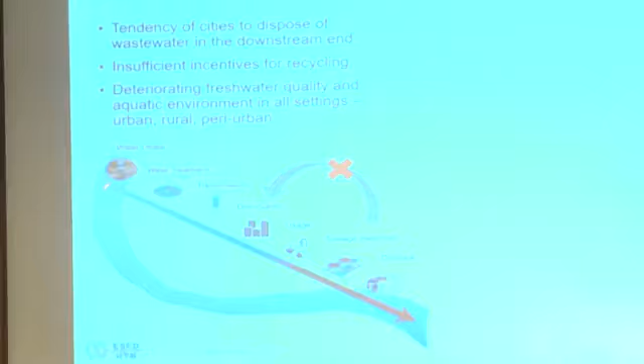So what is the status of sewerage in India? If you see, we are stuck in a linear model of water use, okay? Earlier our primary aim was to supply water for the businesses and cities. So historically we built dams and reservoirs, we lift water from lakes, we transmit it through big lines, we distribute, use, and then the used water, treated, untreated or partially treated, is mixed with our lakes, rivers and water bodies. That is the linear model of development that has been followed.

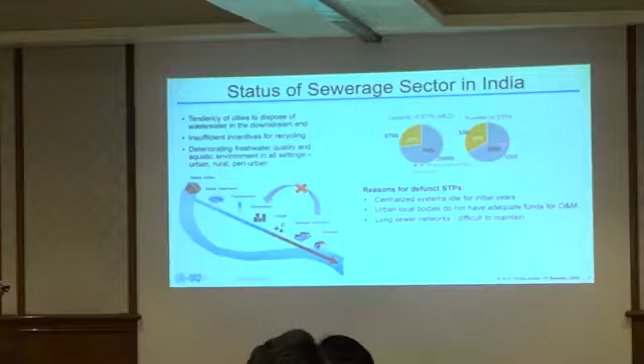Now, STPs are basically proposed to fix this problem, that we'll have an STP here and it will solve it. But an STP will not work on its own unless you put energy, manpower and effort into it. And to put in that effort, you need money. So unless that money is sustained, nothing will be there. So STPs are there, but they may not be operational. Many STPs are defunct wherever you go, because the economics has not been worked out for those STPs. So we have to work out the economics.

There are highly centralized sewage treatment plants which are idle; I will show some photographs where they remain idle. These are just white elephants, sitting there doing nothing. See, the infrastructure is funded by some third party, right? Central government funds and development banks fund the infrastructure, and urban local bodies are meant to maintain them by generating revenue, but there is no strong revenue stream for sewage management, okay? So revenue is not protected, not segregated for sewage management.

So there are issues that I will further explain. The point is that merely creating infrastructure is not sufficient, okay? We may think infrastructure will solve the problem; it may not. The infrastructure is there, but whether it is sustained, whether it is working or not, that is very important.

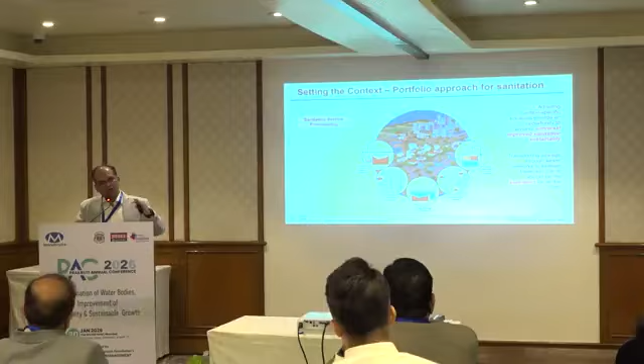So what is happening is we are always jumping on some very high-end solution, that we'll have underground drainage, then the problem will be solved. But if you see, a large part of our cities are unorganized. Informal settlements are there. There are many communities who do not have access to water supply.

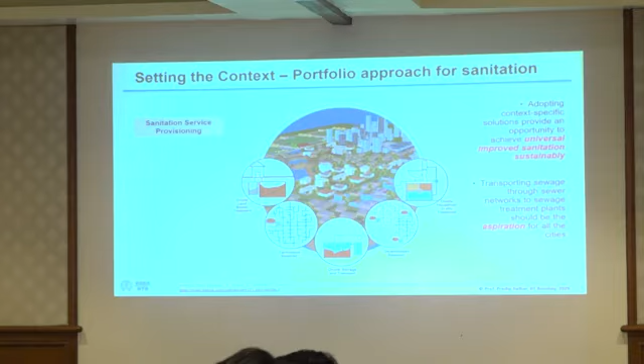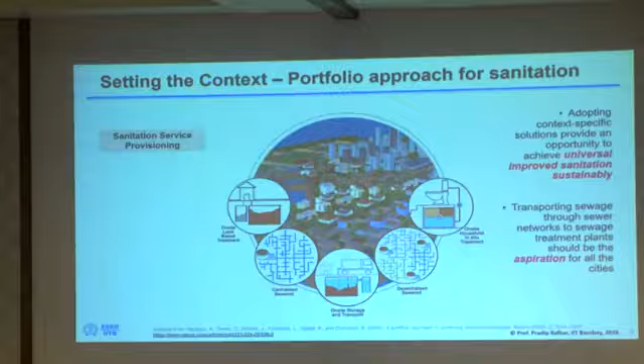So for that, we need to have something called a portfolio approach. Portfolio is that we have to have a bouquet of options given to communities to solve the sanitation problem. If you just focus only on an underground drainage network, only one large-scale STP, that will not work for our future. So we have to move from this centralized sewer; other options are also there, which are not discussed, not prioritized. So like on-site treatment, decentralized sewage treatment, on-site storage and transport. So many other things are coming.

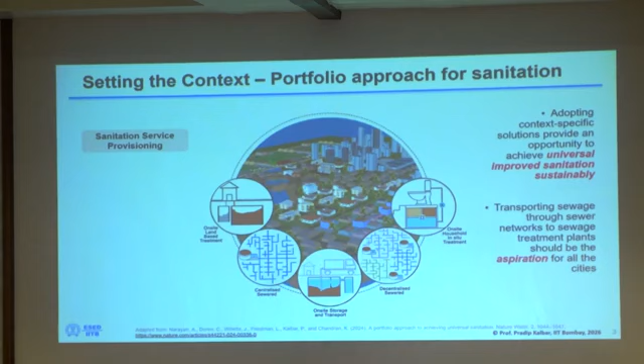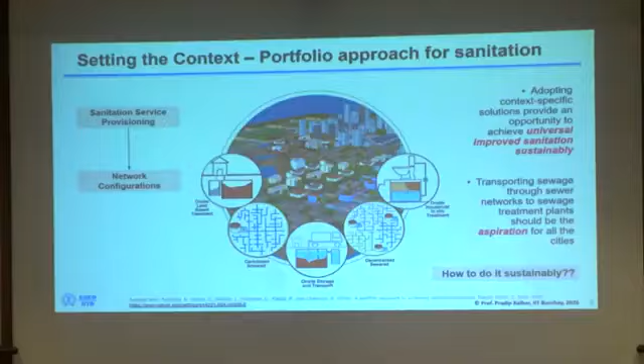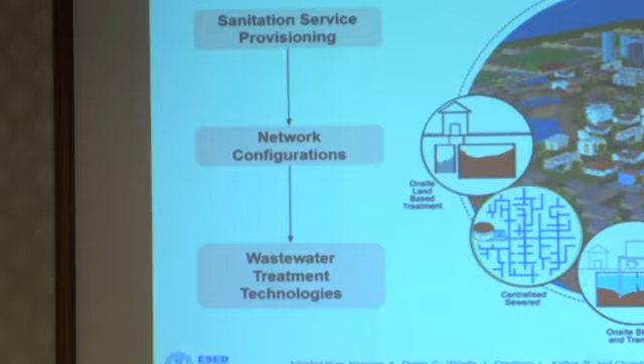So sanitation service provisioning is one part of the challenge. Network configurations: a lot of focus is given on sewage treatment, but how are we designing the sewer networks appropriately, and how to do this entire thing sustainably is a question that I'm going to deal with. So sanitation for all needs a very different approach rather than a conventional sewer-based and STP-based approach. There are many wastewater treatment technologies. We can connect toilet to tap; that kind of technology is available. So it's not about technology, but whether that technology is feasible for the context, whether the municipality will maintain that technology. Those issues need to be discussed.

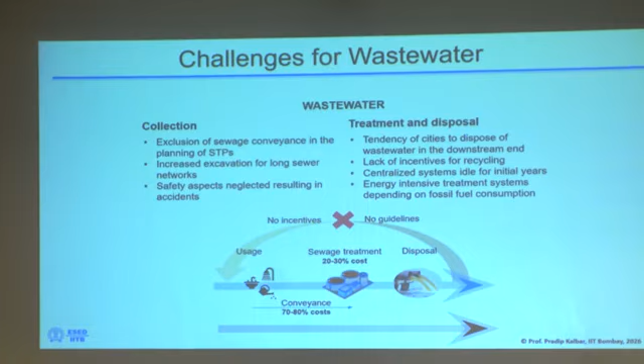So what are the overall challenges then? We are more focused; all the discussions happen on sewage treatment. If you see the cost economics, and again, although I'm working in the engineering department, my work is mostly on management and policy. So if you see the cost economics, sewage treatment costs 20 to 30%, but the network costs 70 to 80%. But all the discussions and debates happen on which treatment technology. That is not the problem, please. The problem is whether our sewer networks are laid properly.

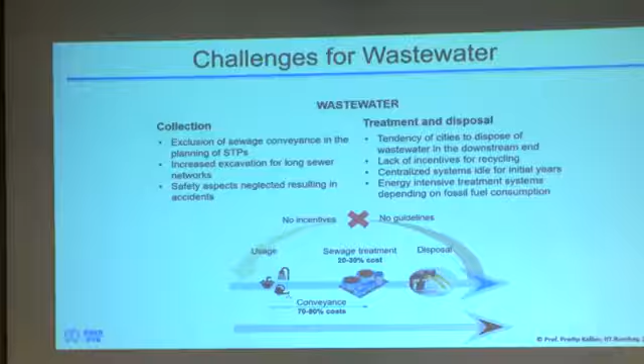I have seen many cities, I will not name them, where the sewer lines are laid opposite to the slope, against gravity. Just a rush to lay down the sewer system. The zones and the planning are not done properly. So even if there is a sewage treatment plant, it is not functional. It is not receiving the sewage first of all; functioning comes second. Our sewage treatment plants are not receiving sewage in the first place. For example, Nanded had a sewage treatment plant in 2010 with a capacity of 87 MLD. Even after these many years, half of the sewage is not received. So infrastructure creation is happening, but utilization is not happening.

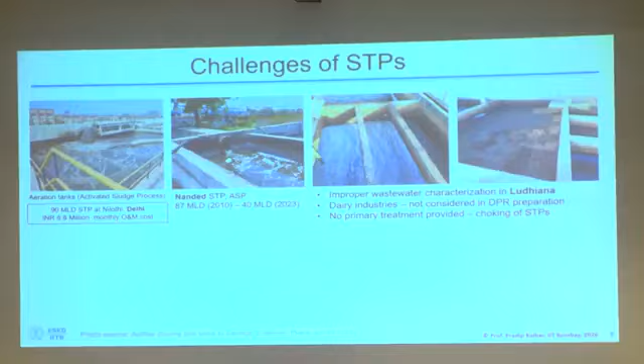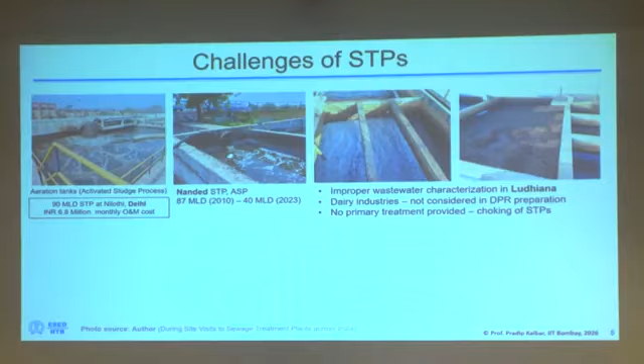We have sewage treatment plants where the DPRs are done so fast that cow dung from whatever tabelas are there in the cities is reaching our sewage treatment plants. So this is the situation. As an environmental engineer, I learned from these big people. The first thing we are taught as environmental engineers is to do site characterization. How many people are doing site characterization today? People are just rushing and preparing a DPR, and that's not to blame any consultant or anyone. It is an ecosystem that puts pressure on the consultant: next week you bring a DPR. That's not the way we should ask consultants to prepare a DPR.

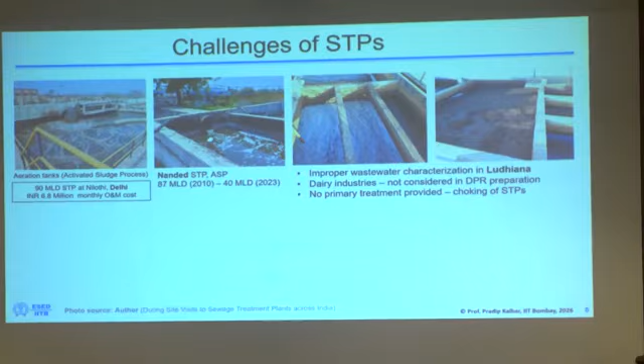So no site characterization, no feasibility, no primary treatment, directly secondary sewage treatment. This is basically failing the first principles of environmental engineering. We have moved away from our own knowledge base. India is a traditional country with cultural heritage. For sewage treatment, we had nature-based solutions. This is from Karad, from Kolhapur. We had nature-based solutions, which have now been converted to mechanized systems. Nature-based systems were a part of our culture. There are very nice handbooks written by some great people from different colleges at that time on how to maintain and do nature-based treatment. Those lands are now taken over, and only part of the land is given, assuming that the mechanized treatment system will work. It will work if somebody pays attention to it.

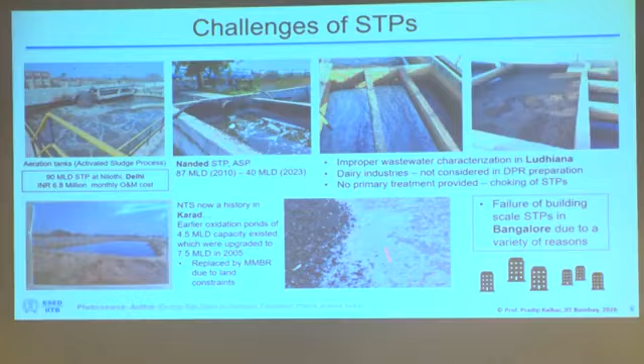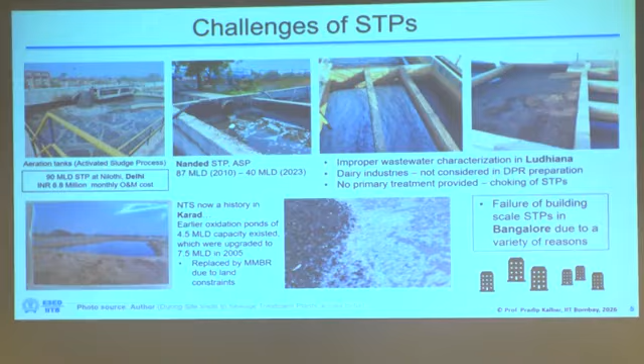Then what happened in Bangalore and part of Mumbai is that because these things are not working, people thought, let us do something at building level. And now building-level STP is another trouble, because my view on building-level STPs is we should not put a burden on a housing society to have a building-level STP of very small capacity, because that is not their job. Having an STP is like adopting a baby. You have to feed chemicals, check the pH, check every parameter. How can housing societies maintain that? And there are not good vendors available. So the Bangalore crisis happened because municipal STPs were not working.

And at building level, they had 4,000 STPs at building level. 80% are not working. So they thought the building will do treatment, and the building thought the municipality will do treatment, and nobody was doing treatment. And then the groundwater was only extracted, so we had a crisis like Bangalore. So we do a lot of such studies.

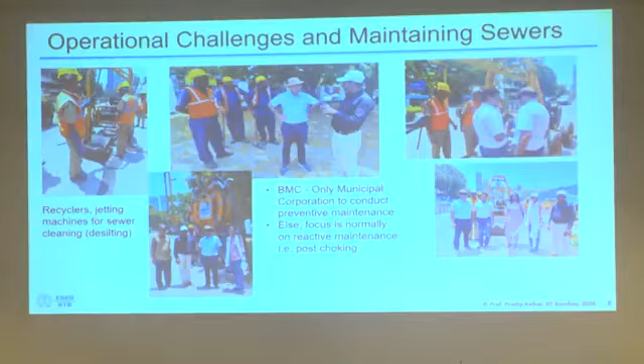This is BMC's. BMC is the only corporation to do preventive maintenance, and that is because of Dr. Salvi. We studied the preventive maintenance part. How many municipalities have that capacity to maintain underground drainage systems? Very rare. And then BMC has to go as a big brother or sister and help other municipalities to train them, and they have a municipal capacity building research center.

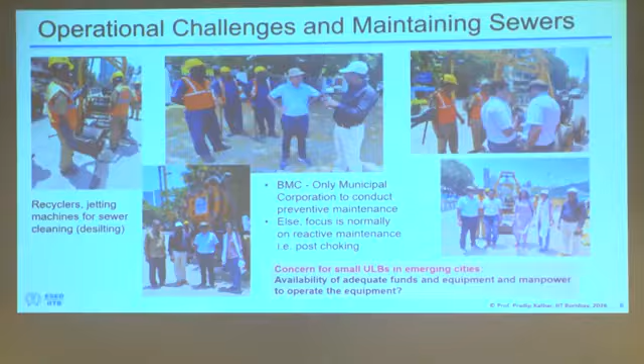So concerns are there for small ULBs. There are many concerns emerging from small local bodies. BMC can manage because they have capable people like Dr. Salvi, and many such people who are helping the municipality to maintain the infrastructure. This is the reality of a small city.

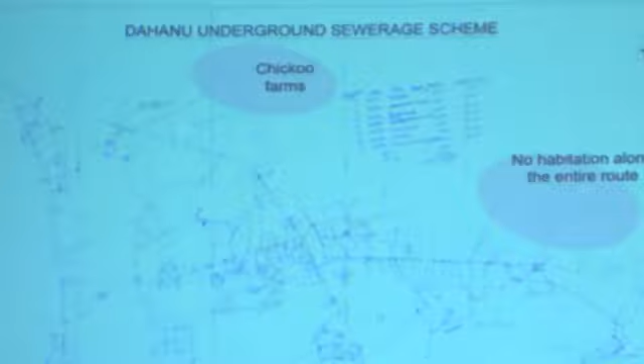This is from Dahanu, where we have worked with big cities like Mumbai and also small cities like Dahanu. Now see the DPR prepared here. When the chief officer called me, he said the DPR cost seems very high. What is happening here? See, this is a chickoo farm. There is no habitation. This is small scale industries.

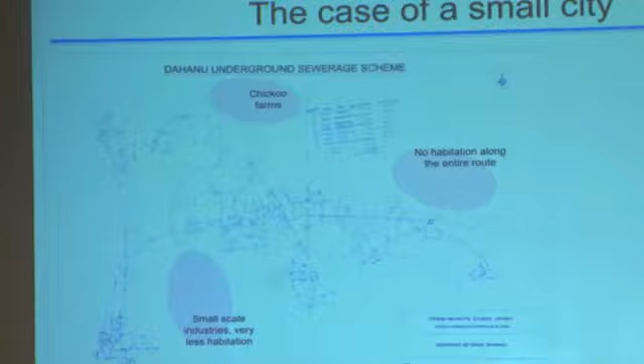So there will not be a possibility of flow for the next 10 to 20 years, but sewer lines are proposed to be laid here, and that is why the DPR cost is increased. And there are 7 to 8 pumping stations in this DPR, so all sewage will be pumped to one location and one STP will be planned. That was the DPR proposed. Now what will happen with this? How will such a small municipality maintain such a complicated sewage treatment?

So we have to change our practice. Excessive pumping proposed, unnecessary sewer lines proposed in areas with very less population, low velocities. I checked, 60 to 70% of the sewers had less than 0.6 meter per second velocity. That is technically not correct, but the sewer lines were proposed here, and such DPRs are getting sanctioned and approved. So these are the things we have to see, where things are going wrong.

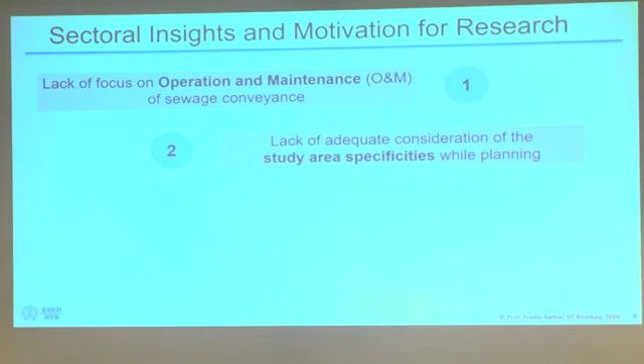So sectoral insights and motivation for our research are there. Lack of focus on operation and maintenance; only infrastructure creation is the focus. Lack of adequate consideration of study area specificities. What works in Dahanu will not work in another city. Dahanu has a very nice topography for nature-based solutions. It is a pond-based town with very nice ponds. So those ponds can be taken into the system, and nature-based solutions can be used there.

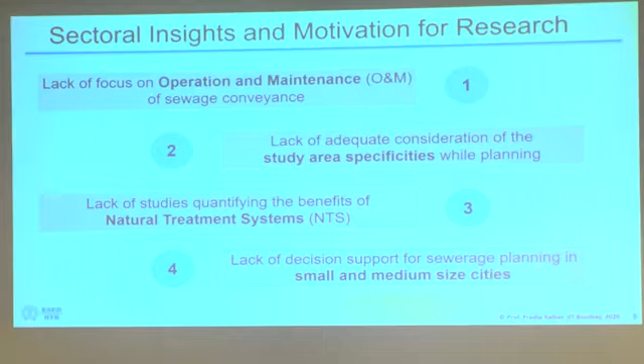Lack of studies quantifying the natural treatment systems. There are nature-based solutions at different levels, different configurations can be done, and decision support is not available. BMC has capacity to think and plan something, but small and medium cities do not have any capacity to do things in the right manner. So they are dependent on many. They basically do not have any guidance.

And one solution doesn't fit all, and that is very, very true for our country, because we have metro cities, million plus cities, tier 1 cities, small cities, coastal cities, arid regions. So if somebody says this is the solution, it is not possible. The solution has to be tailor-made, contextual as per the local condition. You can have the first principles and design what is required on the ground. And that's why diversity is our strength also, right? Because we are so diverse, the knowledge base created in India is huge.

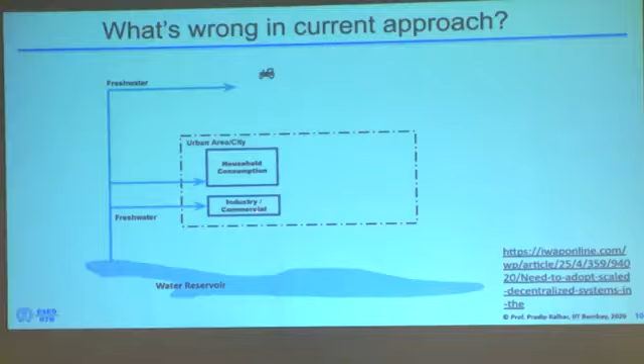So what is wrong in the current approach? This is one classical paper that we wrote. Let's say this is our system boundary where cities are mapped into this box. We have water reservoirs, maybe dams, lakes, groundwater. Historically we are bringing fresh water for housing, industries and agriculture. Something is not visible here, but here is an agricultural land patch; somehow it is missing, and it is really missing on the ground. The agriculture patch receives nitrogen and phosphorus from industries.

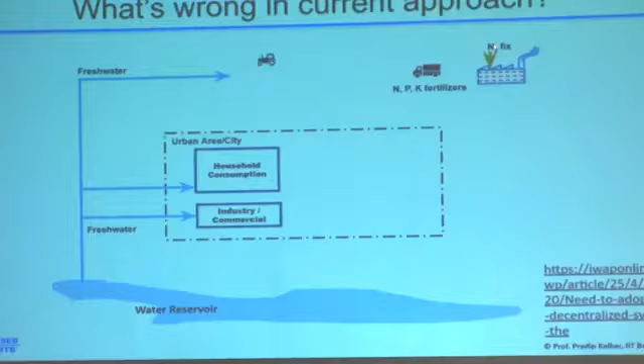Now why am I showing this? When you study things from a system perspective, from a life cycle perspective, many things emerge. So you have to expand the scope of analysis. What happens in cities affects other regions. For example, to fix nitrogen, a huge amount of energy is needed and hence carbon emissions occur. That nitrogen and phosphorus is applied to this agricultural land.

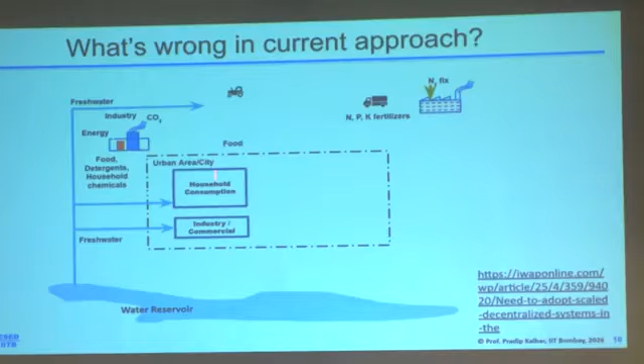That agricultural land provides food for our houses, and detergents and chemicals all come to our houses, and we assume that the sewers will take care of it and centralized treatment will happen, but actually it is failing many times, and then all these contaminants are going into our local water bodies.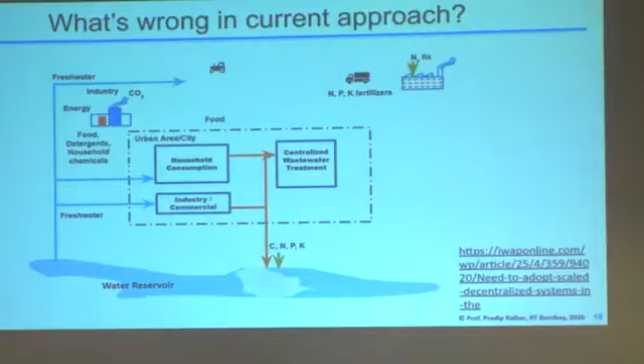Okay, so we are again putting energy. See the smartness we have evolved into, that we are again putting energy to take out the nitrogen. So one level of energy intensive process is happening to fix the nitrogen to generate the fertilizers, and another time we are putting energy to take out the nitrogen, because environmental engineers are looking here, chemical engineers are looking here. These two engineers do not talk to each other. Nobody has looked at the system level. So at the system level, we are fixing nitrogen and taking out the nitrogen, and both are energy intensive processes. So something drastically different has to be done.

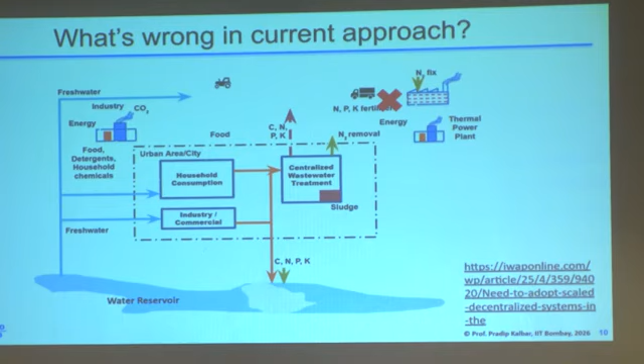How we can generate sludge and compost that can be put back into our original system, so that this cycle can be broken. How we can reduce freshwater consumption and reduce pollution, and create new local water systems for recycling for different purposes. So we have to have local loops of water, rather than putting everything back to the original sources, so that freshwater can be preserved, and energy generation can also happen from sewage treatment. Those concepts are all there, we are just not applying them in an appropriate manner.

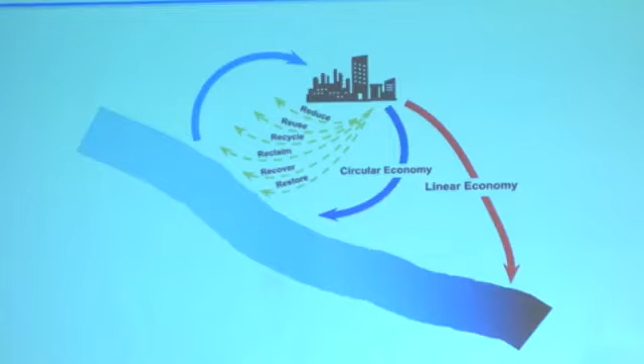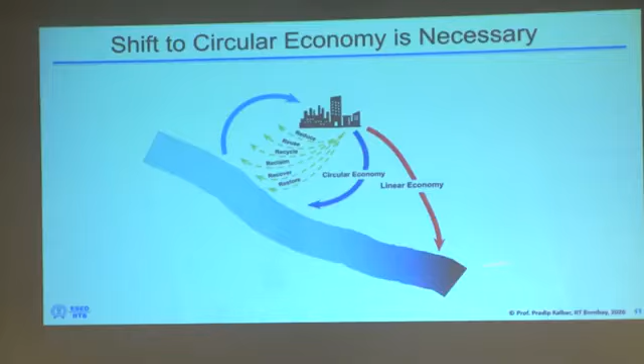So there is decentralization that can also be done. What we need to do is transform this linear way of doing things into circular, by applying reduce, reuse, recycle, reclaim, recover, restore, and many other R's. By innovating, we can apply these to fix this problem.

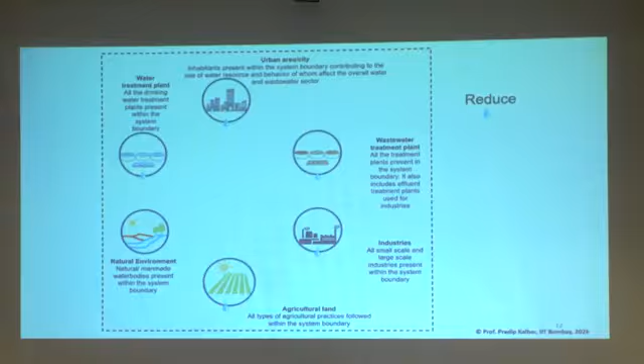So what are these R's? Our water transforms between the natural environment, water treatment plant, urban areas, wastewater treatment plant, industries, and agriculture. So water gets exchanged between these entities, and they have their own physical boundaries. So we have to apply reduce at every level, reuse at every level, recycle, reclaim, restore, and recover.

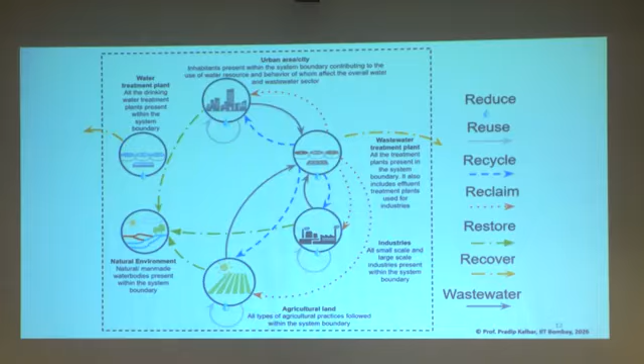When we started doing our research, we found that there is no clear meaning to these terms. People are using them synonymously, which is a problem. So we defined these terms technically: what is reduce, what is reuse, recycle, reclaim.

For example, recycle is use of treated wastewater within the same purpose or same loop. If buildings are recycling, if nearby buildings are recycling, it is recycling. If municipality is selling water to industries, or industries are taking water from municipality, it is called reclaim. Recover is when you recover resources from the system, and restore is excess treated water.

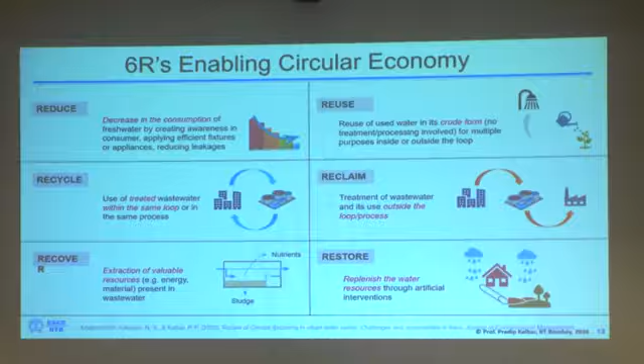Many cities, many townships have excess treated water. For example, 2-3 days back I was in Palava city. They have excess treated water, 10 MLD. Now they are selling it to industries. That is reclamation and restoration efforts, those are there.

Now all that research has been taken up by the Central Pollution Control Board, and if you see their guidelines, they have taken the definitions that we gave from our research. That is, let's say, our contribution to policy making.

So the next part is, you will say, okay, in my city what should I do, which strategy should I start working on, because as I said, the solution for Mumbai and the solution for Nagpur or Hyderabad will vary a lot.

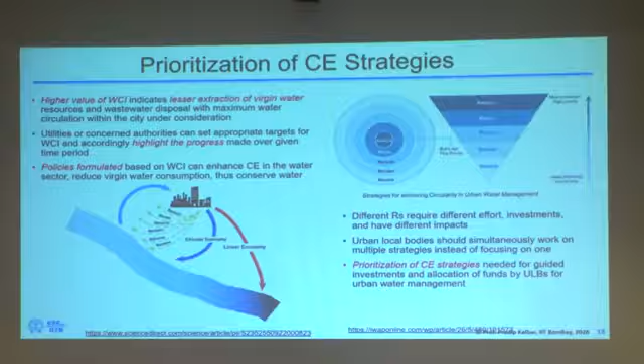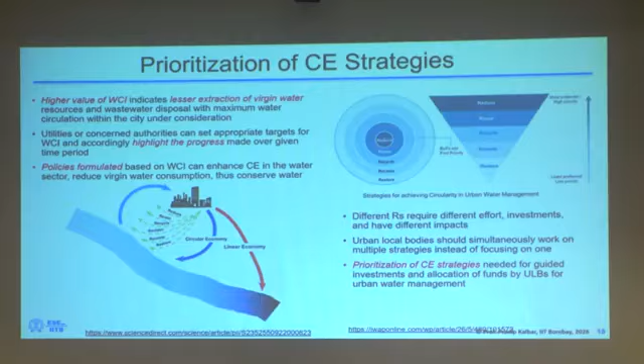So you have to have a priority framework for a given city. Where to start? Reduce is definitely something you have to do everywhere, it is universal. Then whether to reuse, recycle, or reclaim, that is another research question we concluded. Those who are interested can read the papers. I am not going to present a lot of technical details, I am just presenting the broad ideas, just saying that simply saying I will work on circular economy will not work. Prioritization at the local level has to happen.

So, as said in the inaugural speeches, unless you work with many other stakeholders for system thinking, for value optimization, for innovation, collaboration, stewardship, and transparency. Transparency is very important - what municipalities are doing, what every stakeholder is doing, all principles of business have to apply to this circular economy. So this combination has to happen, and only then will things move in the right direction.

So the challenge for water circularity is whether the effluent produced is of recyclable quality or not. In today's time, we are facing huge challenges. We have some trace persistent contaminants which are very difficult to remove.

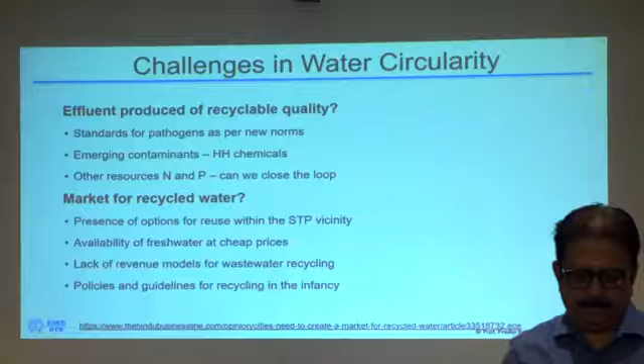Our rainwater is found to have plastic, microplastics. Our rainwater has also not remained pristine. That is because we have emerging contaminants, household chemicals, the amount of pharmaceuticals used in houses, the amount of chemicals used in houses - all of those are going into sewage treatment plants, which are not equipped to take care of these very toxic compounds.

So even if you do this, there's a question of whether there is a market for recycled water, because somebody has to be ready to receive that water. You may produce it, but if the community isn't ready to receive it, even for flushing water, I have seen housing societies refuse to use recycled water for flushing, and that mindset has to change. Rotary Club and many other organizations have a role to play in convincing societies to have a little consideration for the environment, for flushing water, landscaping, and so on.

In this direction, to improve water circularity, we have also developed something called measuring water circularity. We can measure water circularity at the building level, city level, and regional level, and then prioritize circular economy pathways, which I'll share. This measuring framework is one of the successful studies we completed on how to measure water circularity - that is Nikita's work, which is completed.

Now, what are the pathways of achieving this circular economy? Let me share a few examples. Reduce is one of the neglected strategies, because whatever we are doing, the first effort should be to check whether we can avoid the consumption altogether - so reduce and refuse. If we apply efficient water fixtures and change community behavior - many people do not know how to use washing machines.

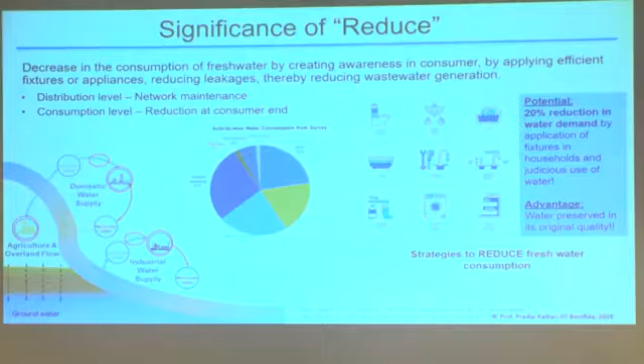We have done surveys. People don't know how to use washing machines, because washing machines consume a lot of water and chemicals. And if your washing machine is not used properly - not fully loaded, and without knowing how much water and chemicals to use - a lot of water wastage happens.

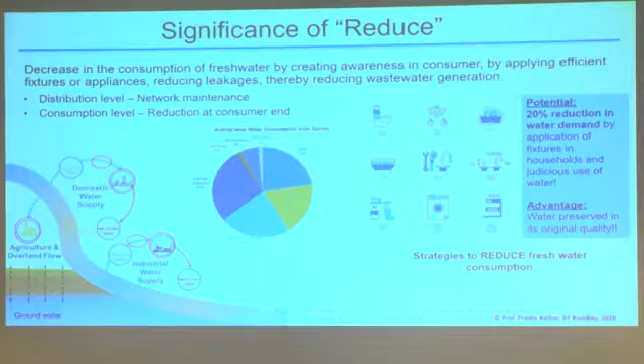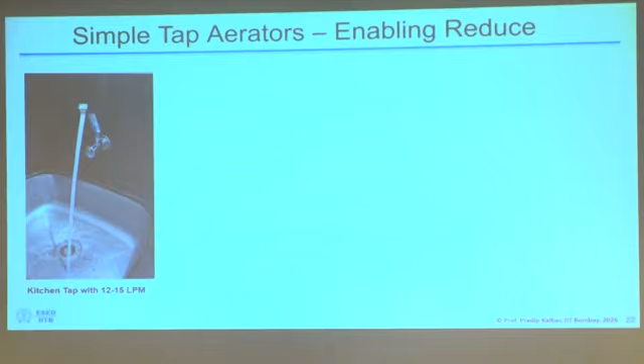So in this direction, I did some experiments at my home. This is a funny story I keep telling in my classes. My IIT gives water and BMC charges much cheaper rates, so we don't care, and we have huge water consumption. So I measured the water coming from my tap, which was coming at 12 to 15 liters per minute. Typically if you open a tap, you'll get 12 to 15 liters per minute - that's a standard water tap.

I was feeling bad that I'm preaching so much about water but not doing anything at my own home. That shouldn't happen, right? Some of you could question me - what are you doing at IIT versus at your home? You could fully ask that. So I thought, okay, let's do something drastic. I bought some aerators and fixed them. I thought I might have solved the problem.

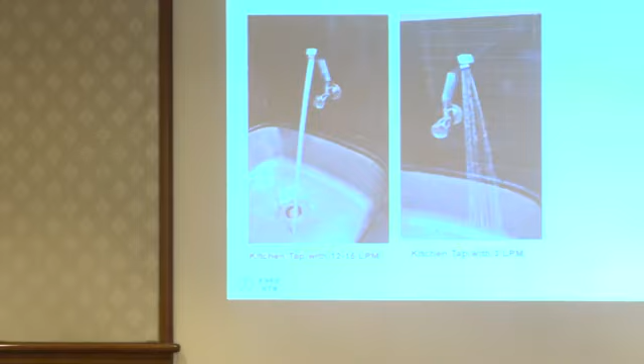The next day, the maid said, I'm leaving, I don't work in this house - because the maid cannot work with this kind of reduced water flow. They are habituated to the higher water flow; they have to quickly wash the utensils and go to the next house. Please understand, even you would get bored trying this, because the water isn't enough - we are habituated, our habits are tied to this flow. Then my wife said, you do the utensils, or you remove this aerator - your choice. And that's circular economy - it comes down to your personal level.

Then I thought, okay, what should we do? I had to become smarter. When nobody was at home, first I put the original tap back for a couple of days. Then, when nobody was at home, I bought a 6 liter per minute tap aerator - see the difference. Now they still don't know today that I've done this. The maid isn't complaining either, because she thinks the same amount of water is coming - it's just a perception, it's just playing a trick with the mind. So I saved 50% of water without telling anyone.

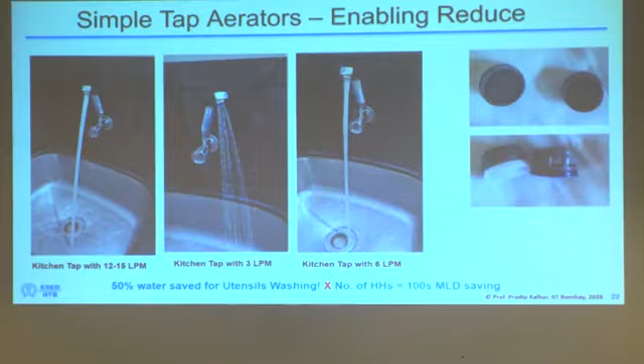Now there's no quarrel, everything is fine. That's circular economy - sometimes you have to do things in a tricky manner, without telling people, doing the same thing but just tweaking it a little. And if you imagine, if the entire Mumbai starts doing this, hundreds of MLD of water would be saved. We wouldn't need a new dam, we wouldn't need a desalination plant. A lot of changes would happen and a lot of public money would be saved, and it would be on a sustainable path. So we have to stop creating problems instead of solving them.

So a lot of such studies we have done, and then we have developed a rating system. Like you have an energy rating system, we have developed a rating system for houses. And with foundations like Prakruti Foundation, we can do house and community rating systems.

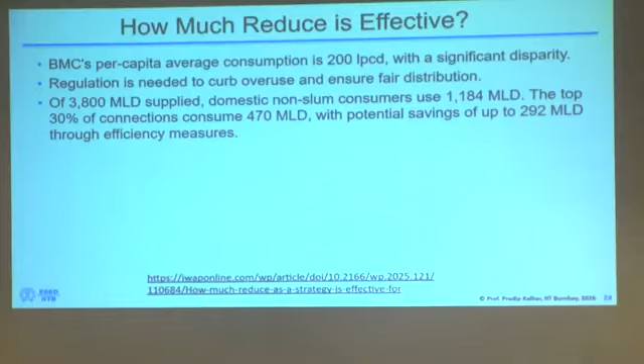BMC's average per capita consumption is around 200 LPCD, and if we work with the top 30% consumers, 292 MLD of water can be saved. Top 30% consumers, if we decide to work on this, there is a lot of potential in reduction which is not talked about, not worked on, not promoted. Municipal commissioners and municipal teams do not largely work on those aspects. So that is the reduction part.

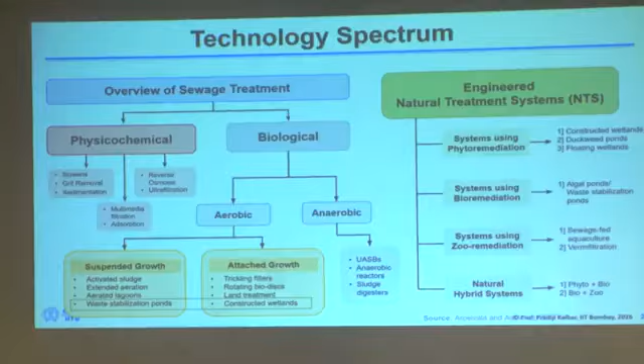Let's say after doing that, you still have used water. What to do with that? There are various approaches to used water management. One is what I explained, and then you have household or building level, decentralized, and centralized approaches. There are many technologies, I will not open this box, but there are many technology providers in the market. You give them the volume you want to treat, they will come. Largely mechanized solutions, and now a lot of technology providers in nature-based solutions are coming up. That's good news.

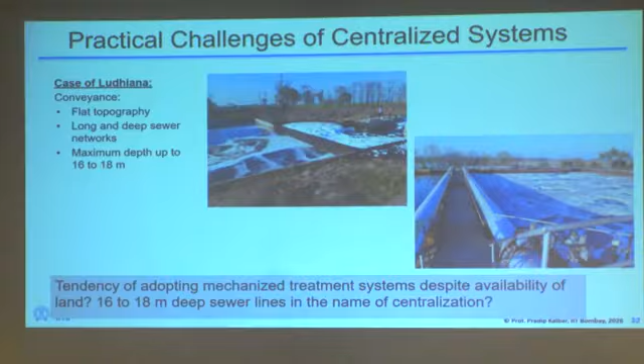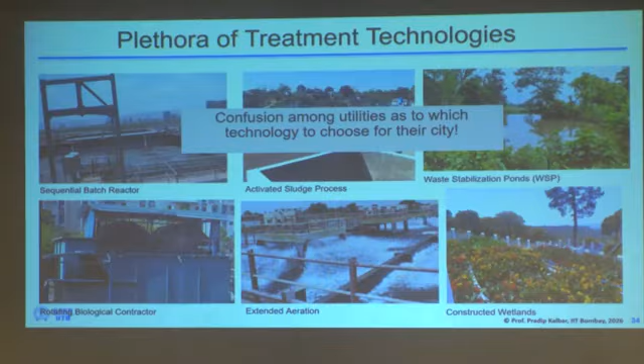As I said, largely the centralized sewage treatment plant model doesn't work. I have seen sewer depths going 16 to 18 meters, very difficult to maintain. I have seen STPs becoming defunct for a variety of reasons. I have seen both mechanized and nature-based solutions, and there is confusion among people about which technology to adopt.

So there is a discussion on whether to do centralized treatment, where everything is taken out to one place, or decentralized, building-level treatment. Different scales of treatment can happen. Now the question is what scale we should do the treatment at, and that's the research I gave to one of the students, which is now completed. How we framed this problem: highly centralized STPs are not working, and highly decentralized, meaning building-level STPs, are also not working. The parameters of assessment are sustainability and resilience.

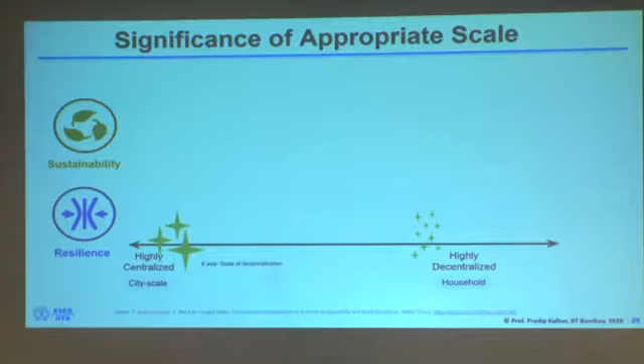What are those, and how can we quantify sustainability? We can talk about sustainability, but we have to measure it. So for measuring sustainability, we use life cycle cost, which comes out lower at some middle level. We have to apply and quantify social benefits, quantify the potential for recycling water, quantify resource recovery, and quantify ease of governance. Whatever solution we give, the municipality should be able to govern it—it should not require another third party to entirely maintain that infrastructure—and it should have lower environmental impacts.

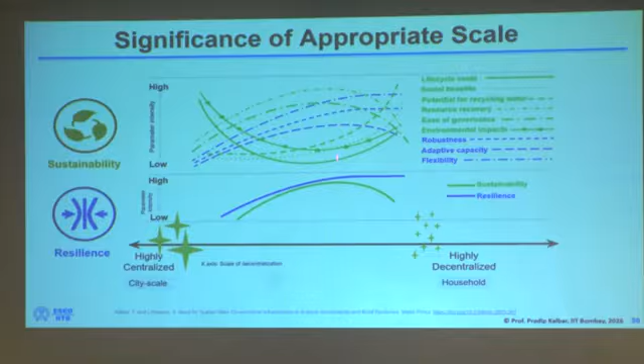So overall, sustainability will be better at something done at the mid level. The new expectation is climate resilience, which I won't go into deeply, but that also works out better for smaller systems, not mega systems. So the ideal zone for achieving sustainability and resilience is somewhere in between. We wrote an article on this, which is now the most downloaded article in the Water Policy Journal, on the need to adopt scaled decentralized systems.

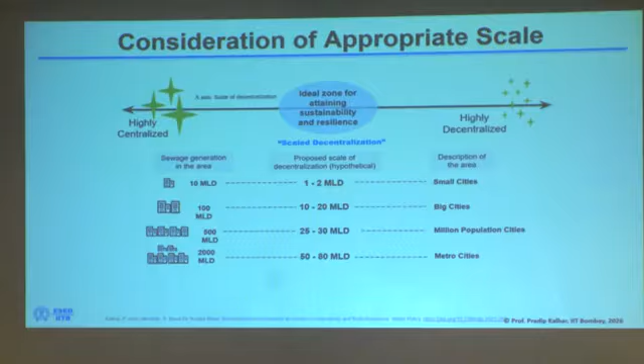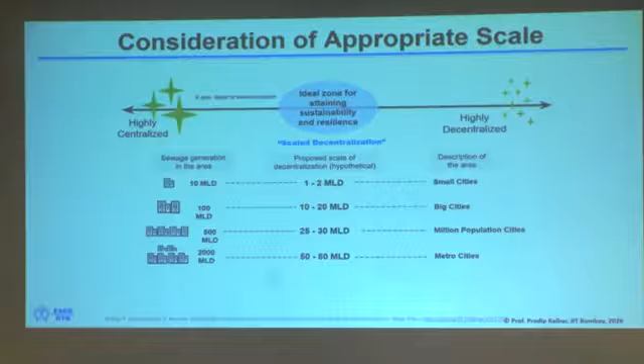Why am I saying this? When I see cities like Dahanu, the consultant prepares a DPR where only one STP of 10 mld will come. What I'm saying is split it out—have 1 to 2 mld, or 3 to 4 mld, at least 2-3 STPs, so that local recycling can happen. Similar logic applies for cities like Kolhapur or smaller cities like Nanded, where you can split up the STPs. For metro cities like Pune and Mumbai, split up the STPs and have local recycling stations instead of putting everything at a very far distance and then bringing it back.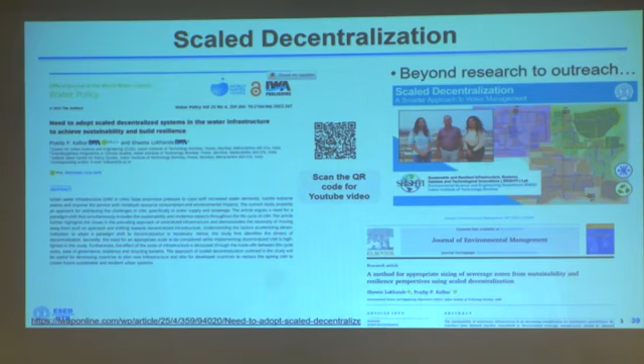So if we really want to do recycling and reclamation, we have to split up the infrastructure, and decentralization is the path. Our students created a very nice video for those who are not from this sector or who want to understand this. They made very good animations—they went beyond publication, went one step extra, and created this video for dissemination of this knowledge.

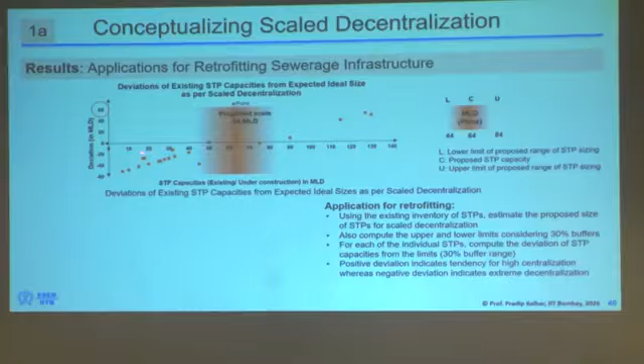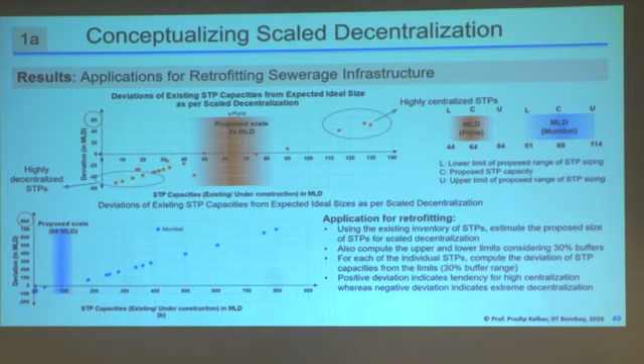So what this research means: on the x-axis you have the capacity, let's say STP municipal capacity. For Pune, the ideal scale is around 60 to 65 mld. But what Pune city is doing is building very large or very small STPs, not at the ideal scale. Similarly for Mumbai, what we studied is that Mumbai is doing mega STPs, or too small decentralized STPs, but the ideal scale is in between, so that recycling happens locally.

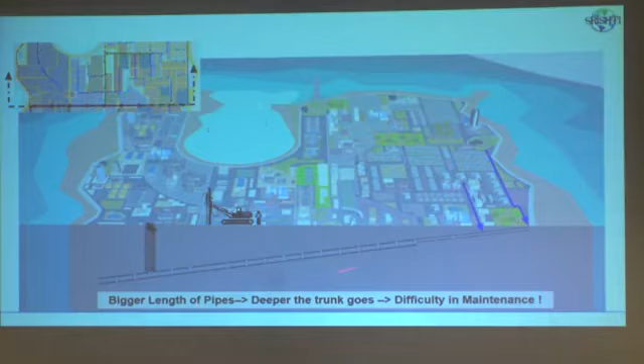Now you do not need another tunnel to take the sewage from here to another location, which is costly and not sustainable, not climate resilient. So what I'm saying is, if this is the city, and if you are building a very long sewer to transport sewage, another hazard that comes is how to maintain it, right?

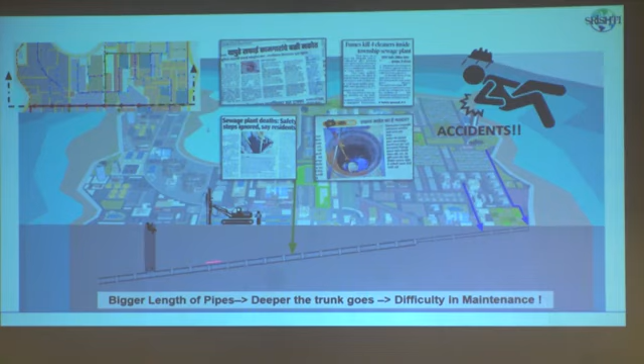There are many cases where workers die and all that. So there are safety concerns also to maintaining deeper sewers, and deeper sewers happen because you plan for centralized systems, then it creates a lot of problems. So what I am saying is that you have to take back the water to different recycling locations if you have only one STP, and if you plan the smaller zones, then you can have localized recycling. That is the point I am trying to make.

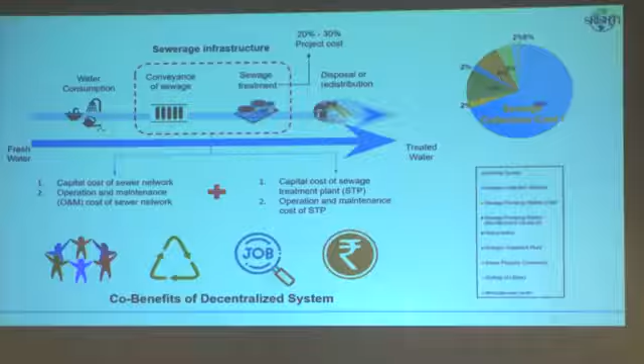And then there are many concepts, like you have to account for life cycle costs. Right now the decisions are made only based on capital cost. The municipality thinks about the current capital cost, but if you see the amount of electricity that is required to maintain the infrastructure for the next 30 years, nature based solutions work out much better because they do not need electricity. So there is a choice we have to make: whether to go for decentralized systems and what level of decentralization, whether to go for mechanized systems or nature based solutions. And both do not work in many contexts.

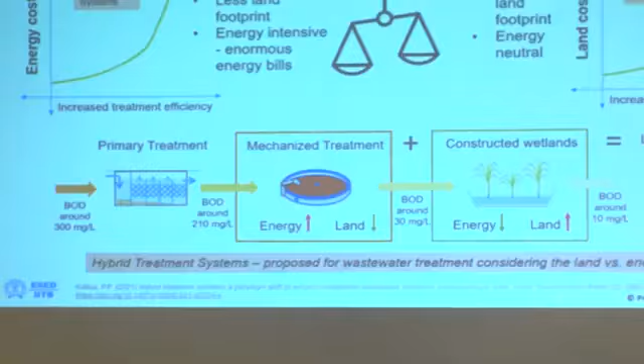So hence we come up with another concept called hybrid treatment systems, where we take the best of the best mechanized treatment system and combine it with a nature based system, because energy is more for the mechanized system, whereas land is more for nature based solutions. So there is a trade off.

If you see, this is the outlet BOD level, and this is the operation and maintenance cost. For high end mechanized treatment, you require 15 to 20 rupees per meter cube or even 30 rupees per meter cube, whereas nature based solutions are cheaper for operation. But the land cost, meter square per MLD, is very high for these green systems which are nature based. So that's why those are not promoted, because land cost is high.

But what I'm trying to say is, if you shift from 30 BOD, you do the best part using the mechanized treatment system, and for polishing treatment you shift to nature based solutions. So you integrate both of them and then you achieve sustainability.

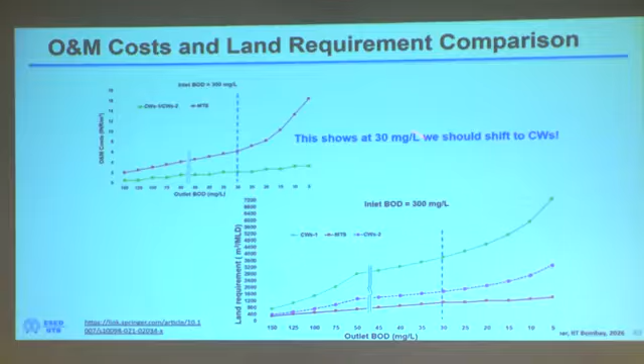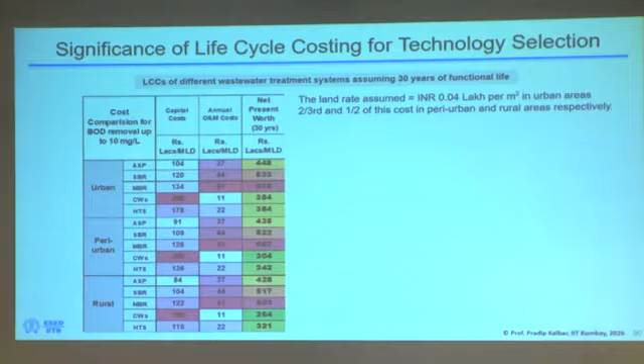We did a market analysis. If you buy land from the market at 2 crore rupees per acre, leave Mumbai aside, but in many other cities it will work. Even if you buy land at 2 crore rupees per acre, in every context, nature based solutions, constructed wetlands or hybrid treatment systems are better than any other mechanized system if you do the life cycle cost for 30 years. So the municipality has to see whether they want to maintain the infrastructure for the next 30 years. So in the economic evaluation, operation cost plays a major role, which is often forgotten in decision making.

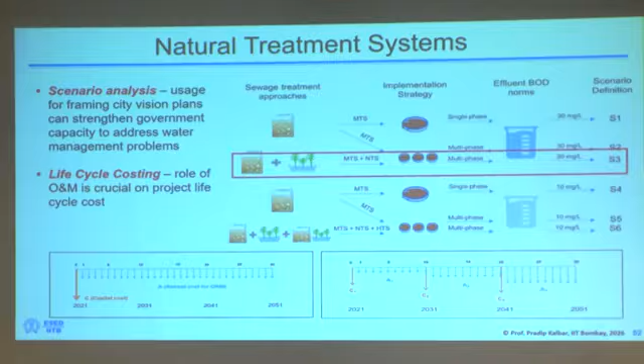So if we have to achieve sustainability, we have to change our thinking of how we do the economic analysis, how we procure the systems, how municipalities take decisions, and that hand holding we have to do as an academic body from IIT Bombay, as a Rotary Club, as the Prakruti Foundation, as many stakeholders. So many such concepts are there, but I will not give more time to this. We do a lot of such scenario analysis, so we will be happy to support many municipalities.

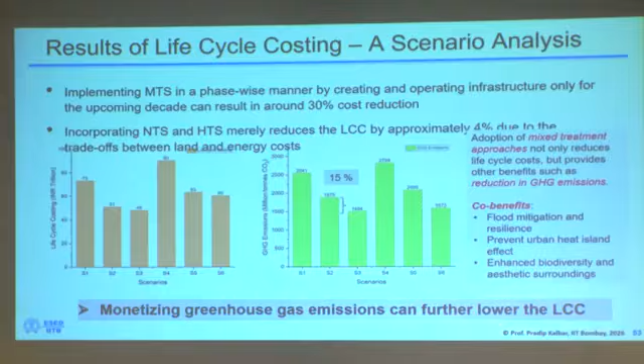There are many climate change benefits. If you go for nature based solutions, you can save money as well as carbon, and that carbon can be traded, and that can also be taken into account. So there are many opportunities municipalities are not trained for right now, and we have shown how much reduction is possible if you use it at a national level. And we have to work for the creation of a recycling market. If you have only an STP and recycled water, and you do not have the agreement with the MIDC and with the industrial clusters, recycling will not happen.

So this is one example based on our research. One company in Himachal Pradesh adopted a hybrid treatment system, where they did some part using a mechanized system and clubbed it with a constructed wetland and a stabilization pond, and the success of the project is that the market for recycled water is ensured. So much of this research is taken up by some companies where they are trying to do things differently by combining both systems.

So I will stop here, but many such solutions are available, and I will take any questions rather than just telling. I shared some personal experience, some municipal experiences, some industrial experience, and a lot of this research is available on our websites, and you can refer to it, and I will be happy to collaborate on these topics.